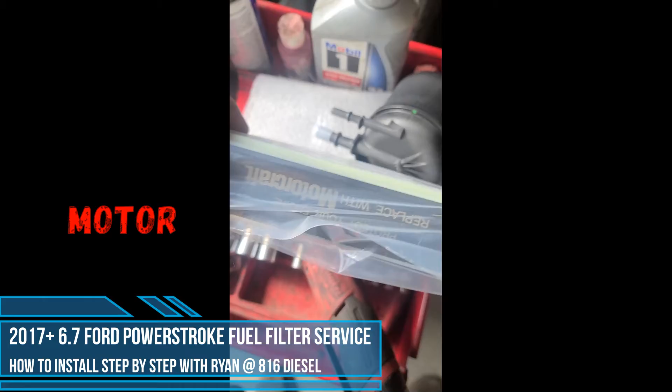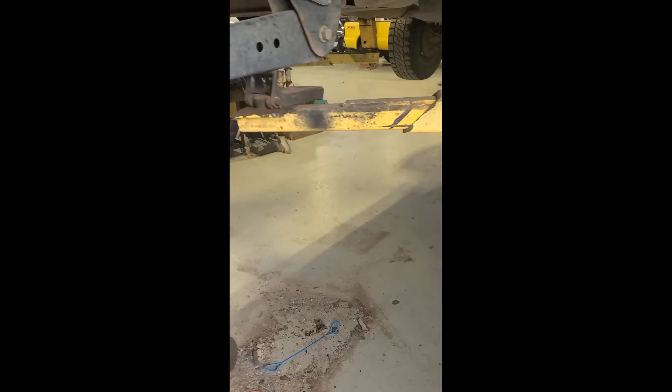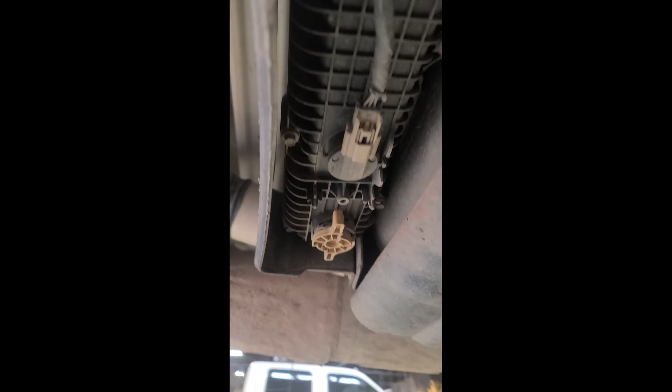Working on a 6.7 Powerstroke today with some Motorcraft filters. There's not any real good videos on how to do these, so I decided to make one. Here's where we're at. My truck's on the lift, obviously, but I'm going to show you what you do. We're going to start here. This is the tank filter. Right here is the water separator.

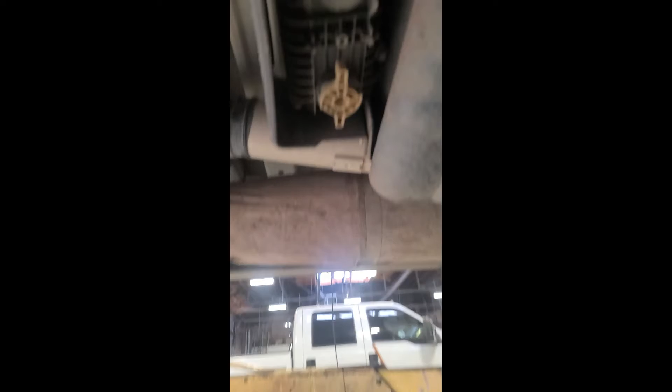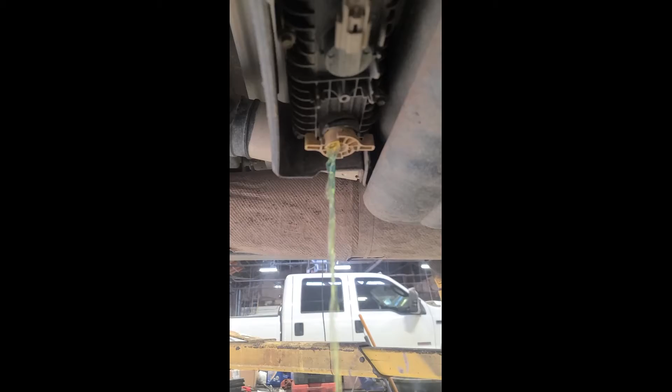So we're going to get a bucket under it and get it drained. It's got a check valve in it, so you'll know when it's drained. It'll literally stop draining. So we'll start here, and then I'll show you guys what to do from there. Okay, so as you can see, that's draining into this bucket. Motorcycle stand, great trick. So we're going to go ahead and let that drain. Pretty simple, pretty self-explanatory on how to open it up, just like everything else.

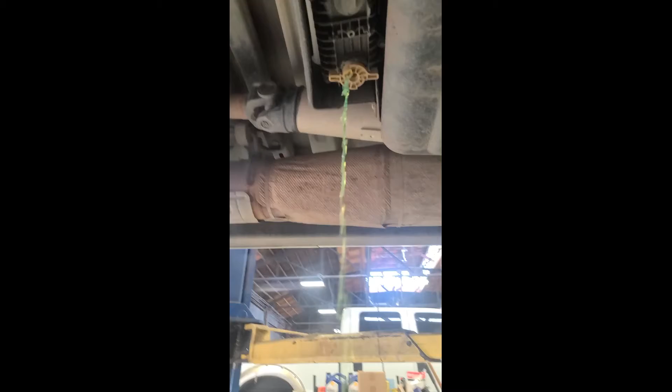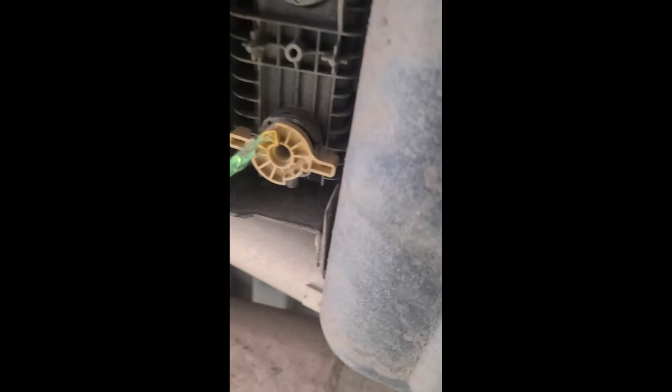Yeah, righty-tighty, lefty-loosey. Once that's drained, we'll disconnect this sensor here. Be careful not to damage anything. This one doesn't have the lock pin in it, but that's okay. I usually go from the back with a little pick and just slide this off gingerly, make sure it comes off nice. And then the next thing we'll do is, you can see there's five 8mm screws. We want to take those out once the sensor's out.

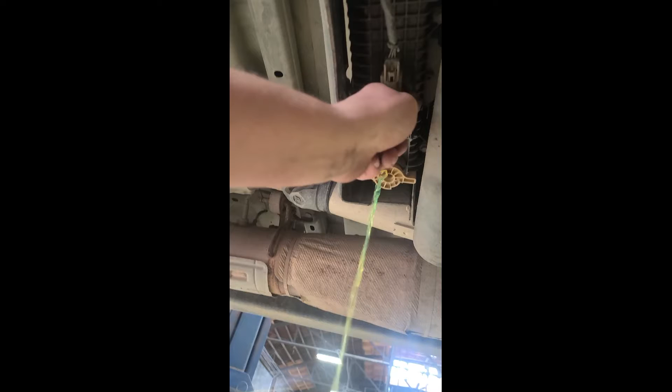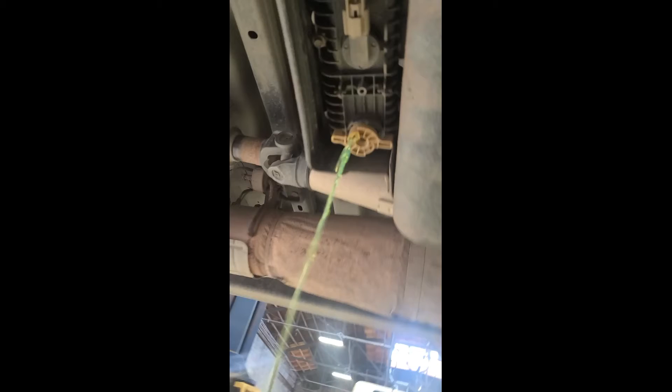So we'll drain this, disconnect this sensor. This just turns and pops out. You want to make sure it's fully drained before you do that. And then take out the 8mm, and then this whole assembly will just come down nice and easy. And you can even see here, they have directional arrows on how to turn it, how to lock it. So go ahead and get this drained, and I'll show you what to do next.

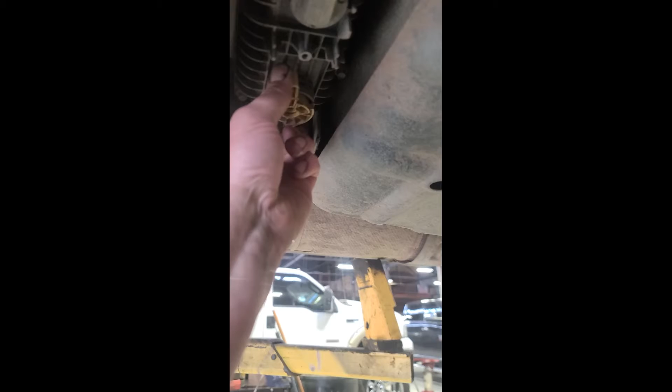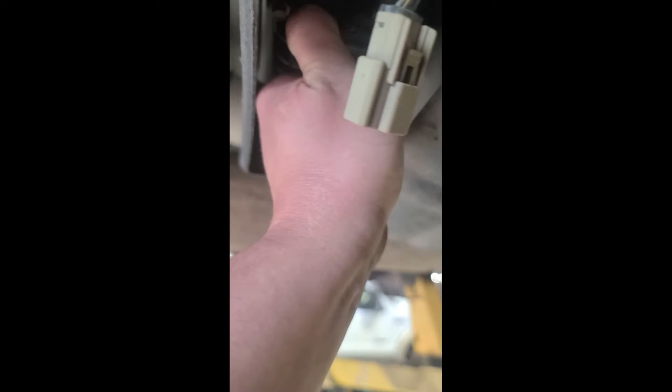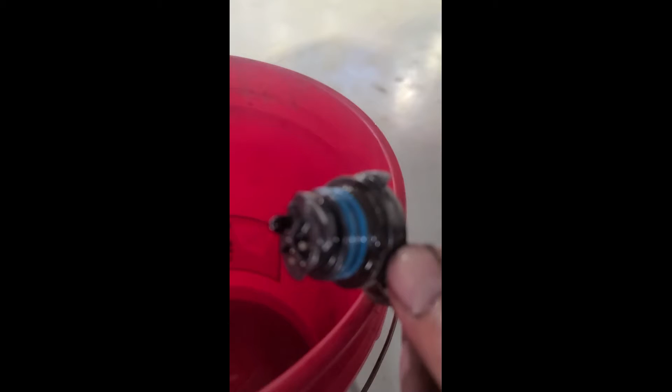Okay, so as you can see, she's done. Tighten that back up, nice and slow. Now we'll get a pick and we'll pop this loose. Okay, so now as you can see, I'll literally just turn that. And be gentle with it when you're wiggling it out. You're gonna get a little bit of spillage, not much, but that gets that out of the way. Check your condition. Make sure you don't have any corrosion or anything like that on it. Set that up out of the way.

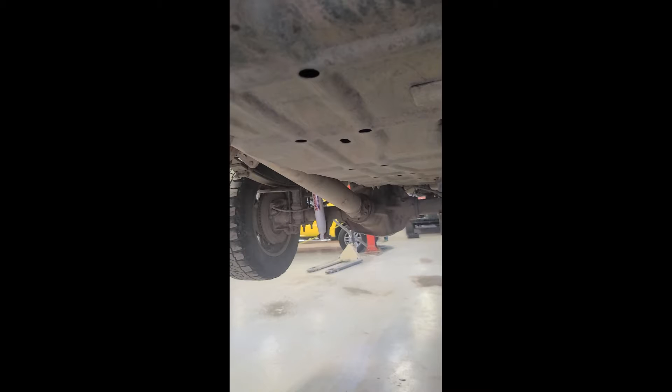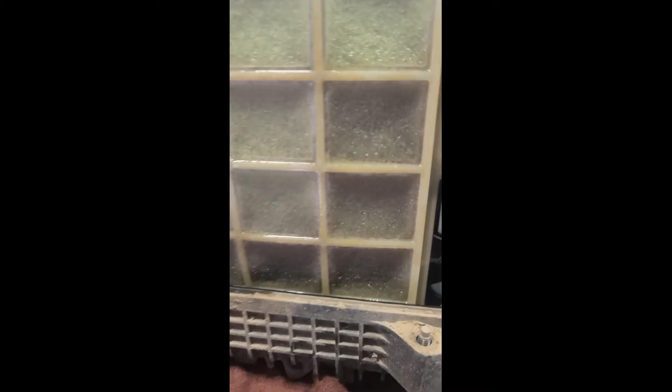And now we'll take off these 8mm. Okay, so just a little heads up, when you are taking those out, make sure that you have a hand on it, because they do like to slip. So I'm going to set this down for a second just so I can clear this little piece and get this out. Okay, so as you can see, here's our old one. Not terrible, not great. I mean, it's decent shape. We just always change them out regardless.

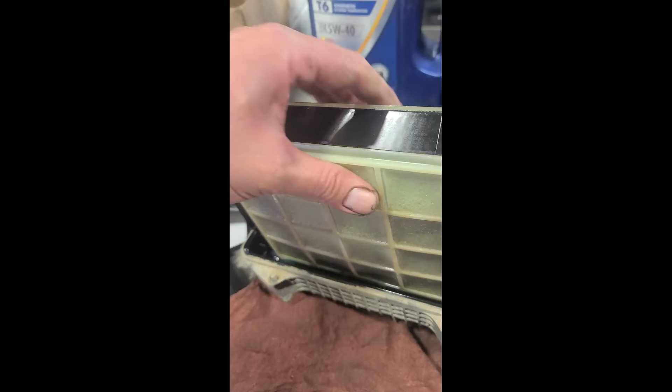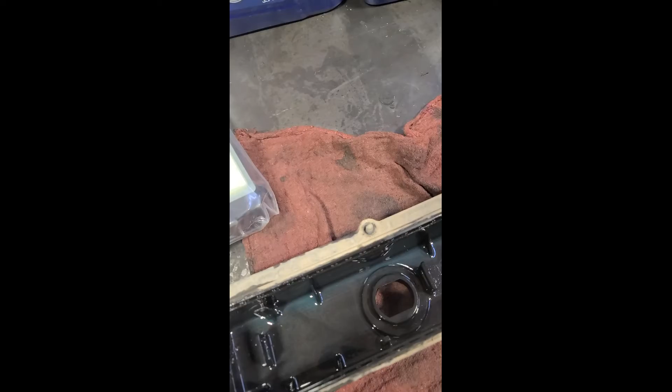This is going to slide over like that. A little more. Just kind of comes right out. Make sure you get all that stuff drained, keep it in a clean environment. Then you'll change out the gasket, which I'll show you next. Okay, so the next part is you want to get a little pick, whatever you want to use, and get that gasket going. Go ahead and remove it. It comes with a new one. Just chuck that. Open up your package.

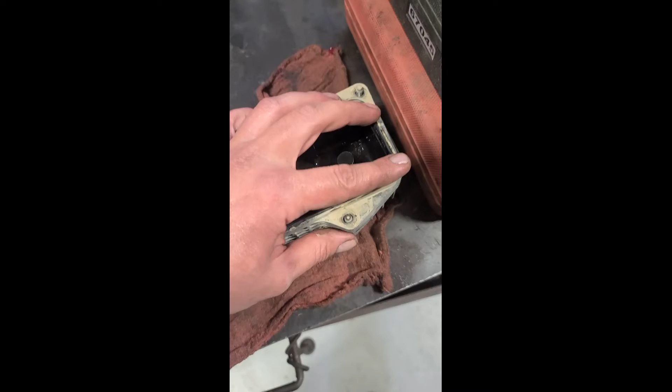We're going to put the new gasket on, make sure everything's nice and clean, and then we'll put the new filter in. And just a little tidbit, when you're putting the new gasket in, make sure you just kind of push it in as you go. Don't just force it around with your finger. Push it all in, and then just double check, make sure it's seated right. Otherwise you can create a gap, and that will not be fun for anyone. So just double check it. Clean this up and put the filter in.

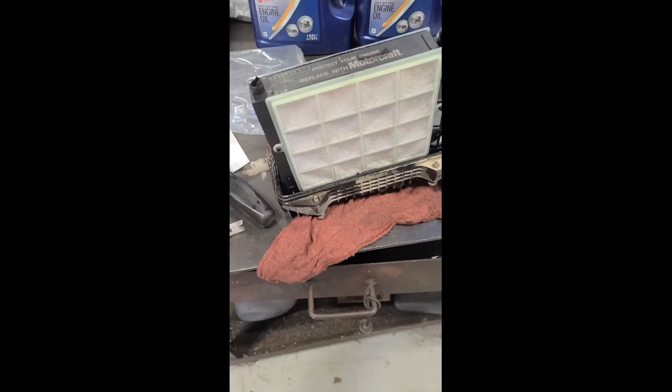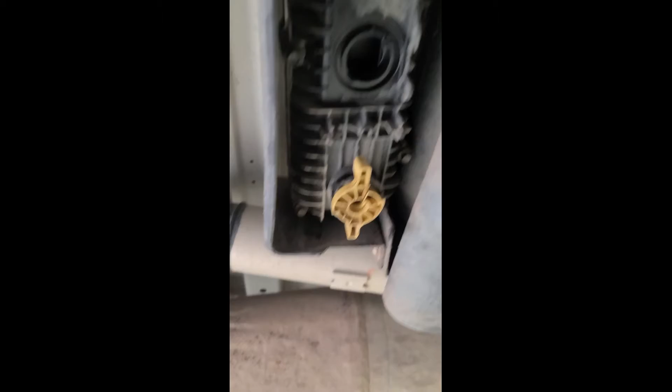Okay, so literally the operation is in reverse. You're just going to take it, slide it over, you'll hear it click, and then that filter's in. Let's go ahead and put it back in. And a little food for thought, this thing likes to move, so make sure that you have both hands, and don't get any dirt or debris on the filter as it goes in. And then I like to start the screws by hand just to make sure they're threading in, because it is plastic. Pretty hard to cross thread, but if you do, it's again not a good time.

So tighten those up, go to spec, and then we're gonna put our sensor back in. Check your O-rings, make sure they're good, and then plug it back in, and we'll go to the front. Now here's another trick, just so you're not sitting there cranking forever. Put the key in, prime the filter. You can hear the pump running. Go ahead and get it primed up, get all that assembly filled back up. I usually do it about 3 times, and then I'll start the truck.

That way there's fuel up to the primary or the secondary filter at the engine. So you just want to really make sure that you get fuel up there. Otherwise you're going to just be sitting there trying to get it cranked forever. It's kind of annoying. I mean, not forever, but it's a while. So make sure you get that done. And after that, we'll go to the engine bay.

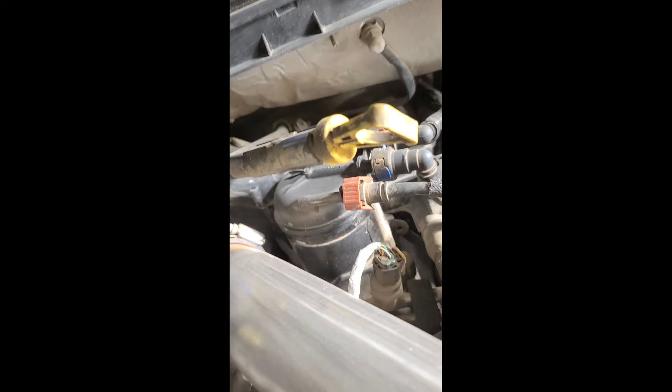Okay, so here's the top side filter. You got a couple things here that you want to look at. You got 3 connections. These are going to push down. I'm going to make sure that tab is down. Very slow with it. You'll kind of hear it clicking as you go. That'll pull out. This is the last one we're going to do.

Now this one, I'm trying to show you guys this with one hand, so give me a second. Sorry. So this one, you can see how this pops down. So just push this tab down. Be slow about it. Take your time. Sorry, again, it's kind of one of those one-handed deals, but anyhow, you can see how it works.

Give me a second. I have to use 2 hands to get this off. All right, sorry. So you can see how it locks. This has to be up, and then when you push it down, it locks. So you want that up. Take your time. Use both hands. Just go very gently and slow. Get that out of the way. You kind of want to just keep everything out of the way a little bit.

And then these are a little trickier. They're going to spread out, so I don't know if you can see that, but these kind of spread out like this. You want to take your time. You want to be really careful here. Make sure everything's kind of clean around the area. I usually get a little flathead and then just kind of help these. It's a 2-hand job. You're going to back that off, and then this will turn and then pop straight up, and then you'll put the new one in.

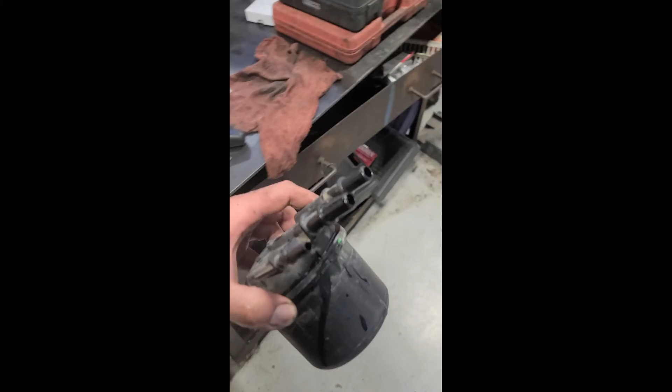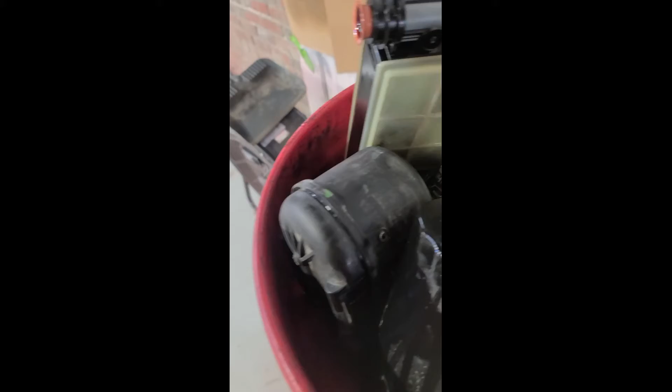So hold on. Now, as you can see, I got that out. Pretty simple. You're gonna have diesel, so it's gonna spill a little. It's not bad, but go ahead and get that out of the way. Drain that thing out. You're gonna come back and get your new one. Now they have an update for this. I'll show you what that is here at the end. But for right now,

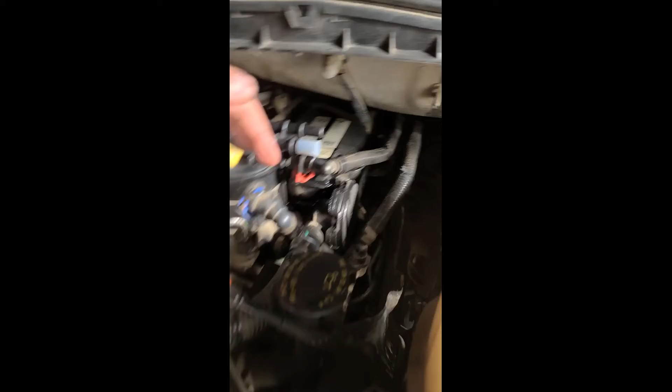again, kind of just make sure you stay clear of this line. And you can kind of see now, you have a better handle on it. It's these 2 tabs, just kind of push back and up at the same time, and that'll clear it. Okay. Well, anyhow, so I'm going to use 2 hands, get this in, and then we'll hook our lines up. Do not pull this cap yet.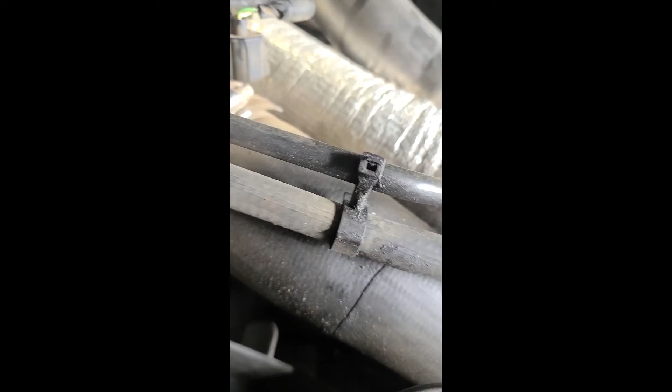Okay, so as you can see, this is pushed back, this is locked down, this is put back in. I do this one last, so do these 2, make sure everything's clear. You do not want to get any dirt in this line. And then just kind of wipe everything up. I'll also show you the update. I got in a new kit. Woo! From Ford. So, where did I put that thing? Give me a second, I gotta find it.

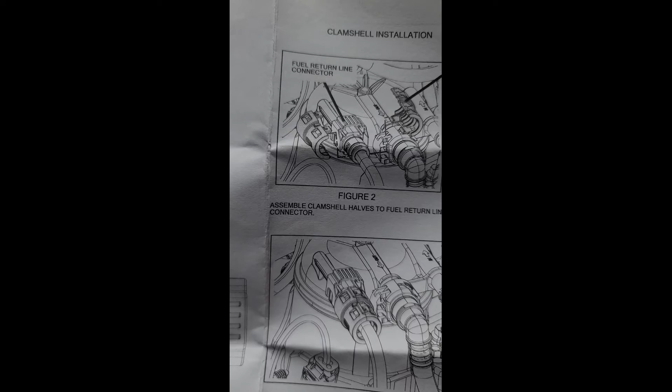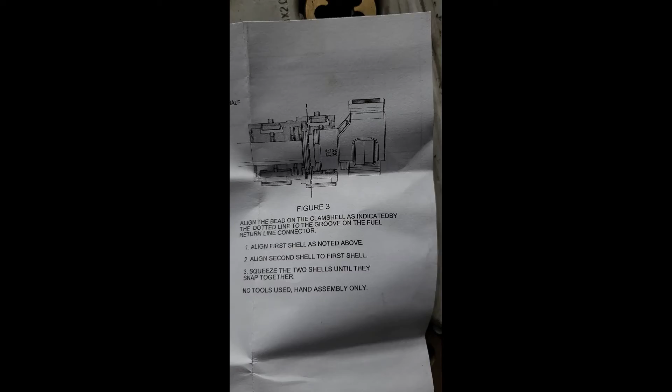Okay, so for the outside line, you can see this here. They have a new coupler. I don't know if they had issues with it. It's called a clamshell. So effectively, what you're gonna do is put this on. It'll come in a kit, kind of give you an explanation. So I'm going to go ahead and install the new update. I think it's sitting right over here.

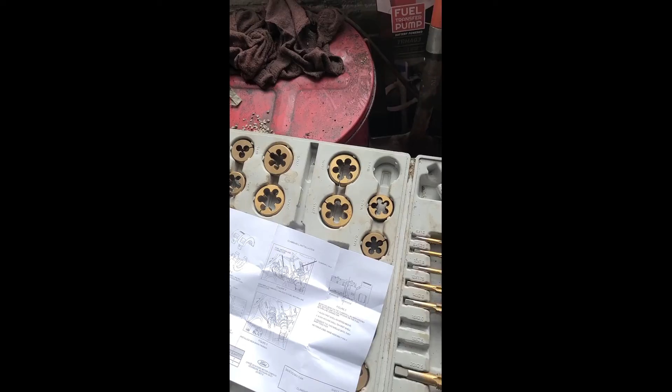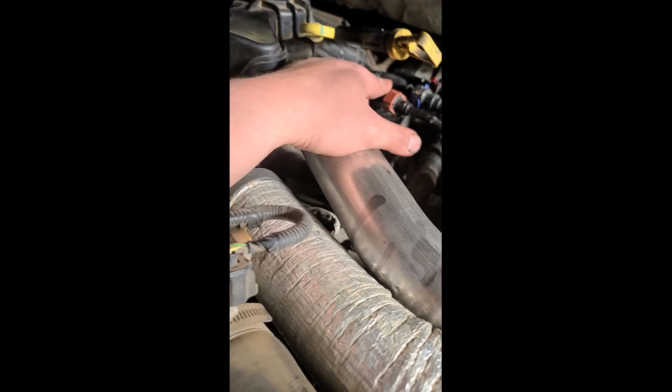Yeah, these clamshell halves. So just go ahead and follow the instructions. They're pretty self-explanatory. And it's going to go on this outer line right here. So go ahead and get that installed. I'm going to read the instructions, follow them, and show you how it goes.

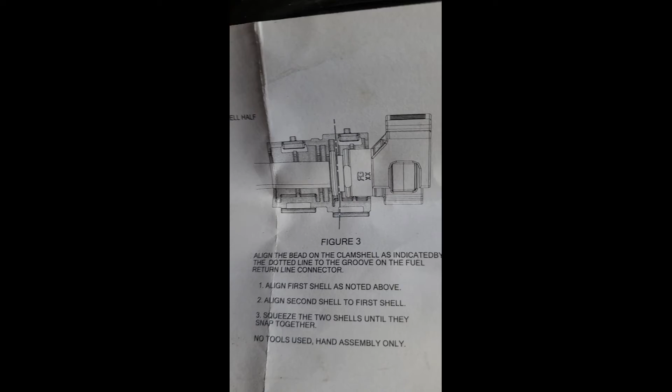Okay, so pretty self-explanatory. You're going to put these clamshell halves on. They literally go right here. I don't know if they had some kind of issue with it, but you're going to go ahead and put those on. And then that's how they sit. So you still leave the lock tab. Basically these, I don't know if they had an issue with the line or what the deal is, but it's from Ford, so I'm going to go ahead and install it.

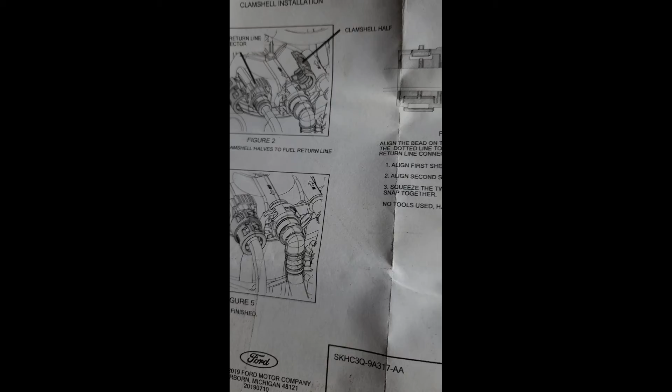And then take a feeler gauge, check, and make sure you're between 0.75 and 1.2 millimeters. There's no gap along the seam, and the clamshell tabs aren't broken. So went ahead and did that. But now you got fuel, everything should be good. You got your new filters in, so truck should be ready to rock.